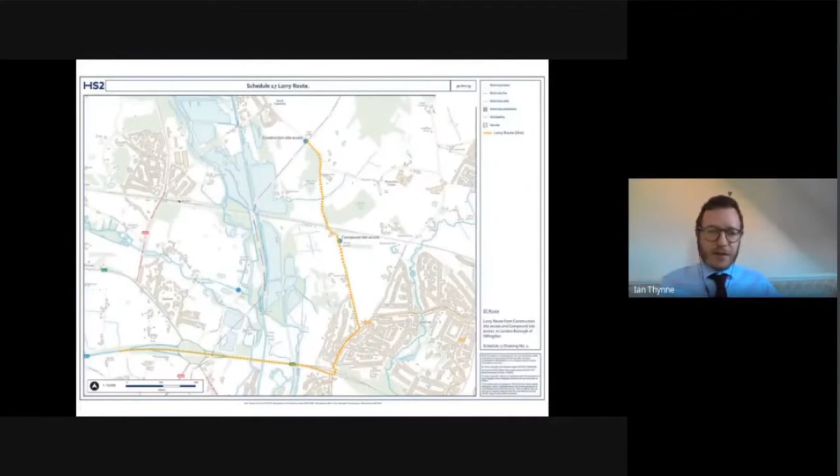Slide 2, that's just the route showing you the way they come out of that - so that is access left out of the compound site access, and right, importantly right, out of construction site access, onto the road of Harvil, right onto Harvil Road into oncoming traffic. So that is a concern that we'll consider in more detail in due course.

Just to give you a little bit of context as to why all these lorries are moving around—it's a slightly messy slide, but the intention is to give you an understanding of why we're moving lorries around the route and what the current works are supposed to support, just to assist with decision making and give context for those interested.

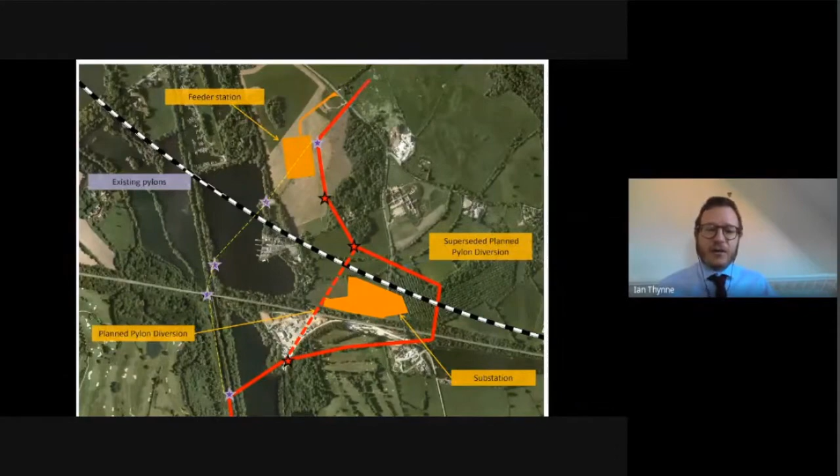Pylons require hefty substructures and significant foundations. The LGV movements are predominantly linked to the removal of broken up foundations and the material to import more aggregate to form new foundations. There's also delivery of the actual structures themselves, which come in kit form and get built up on site. So there's quite a lot of activity associated with moving 6 or 7 pylons, removing 6 or 7, and replacing with 6 or 7 more to get this new alignment in.

So that's the context, Chair.

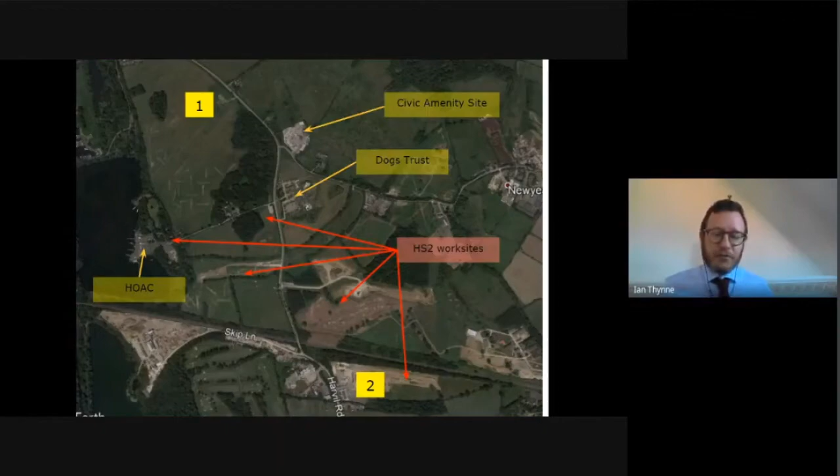The red represents the update we received last night from HS2 Limited, or from the contractors working on behalf of HS2 Limited. So what's happened is, because of COVID-19 and various other matters, the project has slipped somewhat, so we've needed to update the charts as to when the vehicle movements happen.

Now, the problem we've run into is that because there's been a shift in the program, the site operators National Grid have lost a lot of predominant access to the compound access site—that's the one on the southern end, site number 2, to the east of Harvil Road, just south of the Chiltern line. So they no longer have access to that site in the same way as originally presented.

Consequently, most of their movements will now be going to the main access, site number 1, west of Harvil Road, up near New Year's Green Lane. Originally, what was intended was that there'd be 50 movements to that site and 40 movements to the compound access south of the Chiltern line.

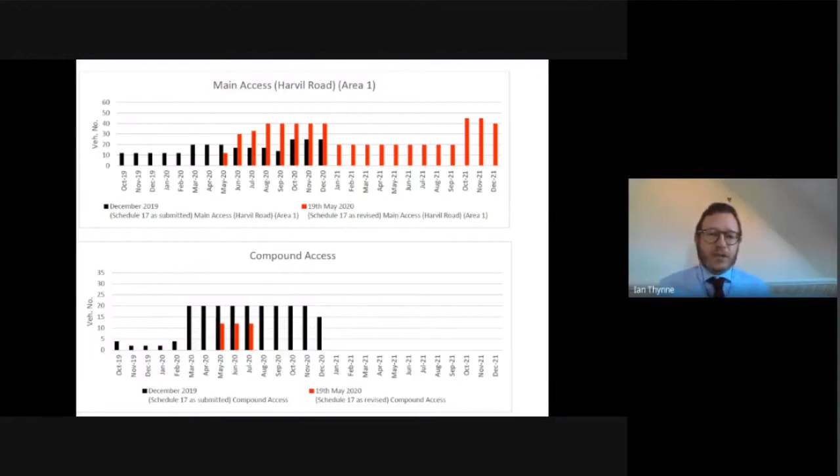The problem is now that they're all merged together to go to one particular site, by a small number that you can see there in May 2020, June 2020, July 2020. So there is now a more intensive use of site number 1, which is a concern for the council, and also a concern for officers, certainly.

Cumulatively, as opposed to having 50 movements a day at that particular site, we're now dealing with 100. These movements are in and out, so that's 50 in, 50 out at its peak, give or take—about 95. You can see the peak activity happening around July, August, September of this year, and then another peak towards the end as they pack up and leave.

That's obviously a concern. That's 100 movements into one site just off Harvil Road, in a particularly concerning area. It's a fast-flowing area of traffic at that point—vehicles are clear of the rest of the HS2 work sites, building up speed before they get to Harefield, and this would be a lot of slow-moving vehicles moving across fast-moving traffic.

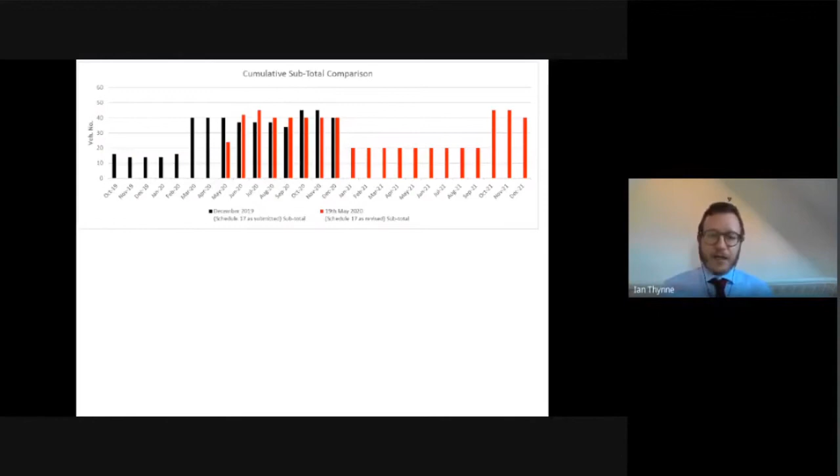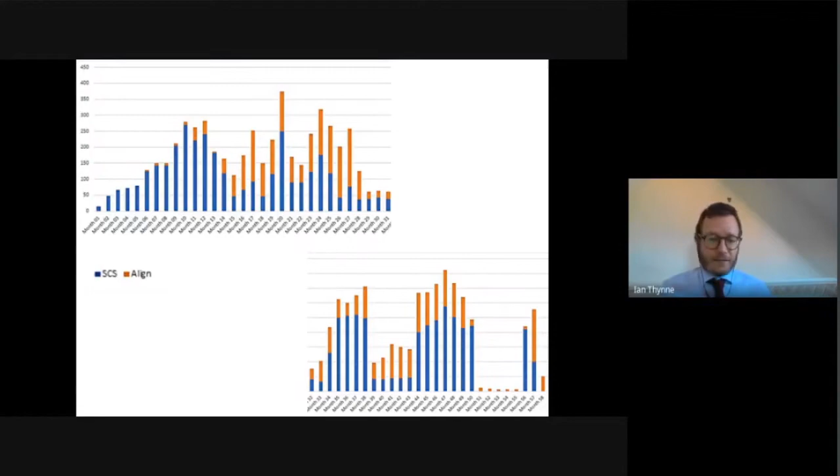Notwithstanding that, there is obviously a concern about moving those vehicles onto and off that highway at that particular point. In summary, these are limited ancillary lorry movements to the main work. The movements associated with the main works are subject to an appeal. There's no evidence available that movements at this level—100 movements a day at this particular area, for a very short period of time relative to the rest of the project—would cause prejudicial effects on the free flow of traffic, in terms of congestion.

The concerns around access, though, have now come to a head. There'll be double the amount of slow-turning vehicles moving across fast-moving traffic approaching Harefield, free of any other restrictions from any other work sites and turnings, as I mentioned. So there is a concern about safe movement of vehicles, and also whether or not those vehicles would end up queuing on the road or causing delays to other road users.

As this information was only presented last night, it leaves us in a difficult position. So the recommendation is two options, Chair. We can either defer to allow HS2 Limited to provide more details on the access arrangements—we don't have sufficient detail—or alternatively, the council can request a condition to secure further details relating to the access arrangements.

That condition would be similar to what we put on last time: prior to the use of the roads for more than 24 lorry movements per day, a scheme for the arrangements—e.g. banksmen, stop and go signs, holding areas—used at the accesses to the worksite shall be submitted and approved in writing by the Highways Authority, i.e. the council, to secure a safe working arrangement at that site. We think this condition is reasonably capable of modifying the existing arrangements, and we think it ought to, given the obvious concerns around safety.

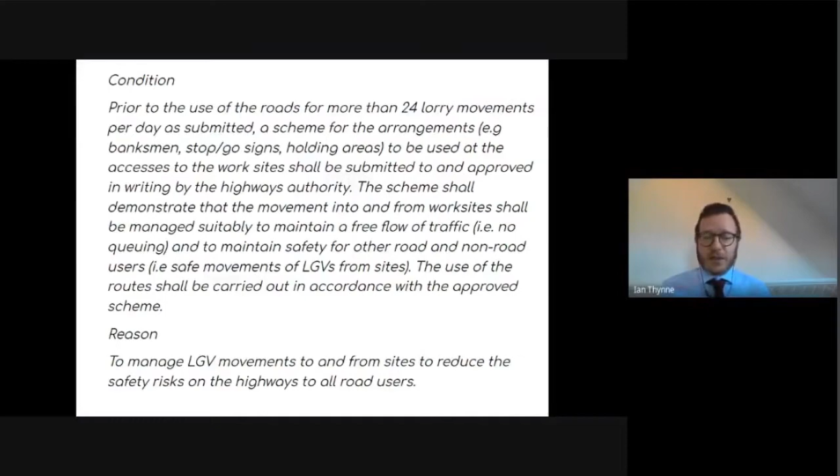However, it would be opportune for us to give HS2 the chance to provide a response to the concerns in this condition. Officers' opinion is that if they can come up with arrangements that negate the need for a condition, that would be preferable—not least because, generally speaking, HS2 Limited do not agree to the imposition of conditions. And in that scenario, normally the officer recommendation is for refusal, which would result in an appeal. So those are the two options, Chairman, as far as officers are concerned: deferral or a condition.

Thank you very much indeed.

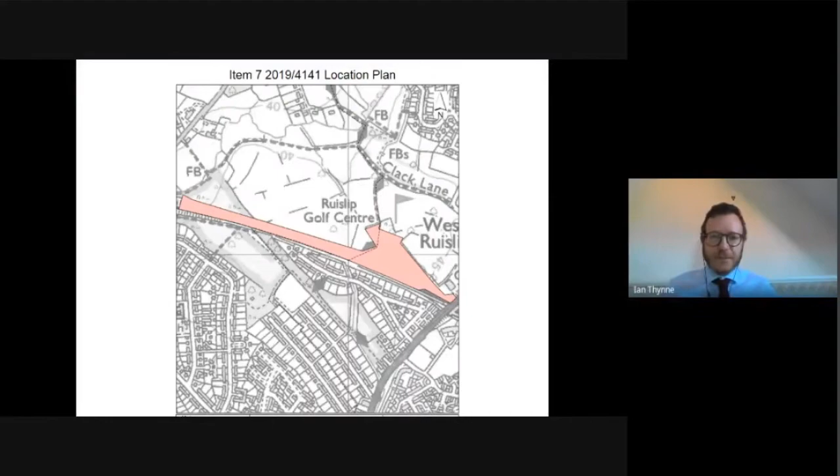So there are several aspects to this, all covered under Schedule 17, but various different parts. The first part is building works under Schedule 17, paragraph 2, and that is for the West Ruislip portal, including the ventilation slots, the portal head house, and the substation building.

There are also earthworks to create some of the building works. So there's the West Ruislip portal hood, a section of the West Ruislip retained embankment, retaining walls and ecological ponds in the golf course. Accompanying that, noise barriers alongside the new route, a road vehicle parking area.

It's referenced in HS2 Act, Schedule 17, paragraph 3, fencing and walls, but again, as with previous submissions, it's only the alignment that the council's interested in or can consider, not the type of fencing wall. And finally, artificial lighting equipment, predominantly used to light the access road to the head house.

So quite a complicated submission. Hopefully I'll be able to explain it in simple terms. Happily take questions at the end.

So there's broadly the red line. We don't need to see the writing on there, but I just want to give you a feel for the broad plans there. So you can see the ponds here. You've got the head house structure here, the access route moving down towards the same road that's served for the golf course.

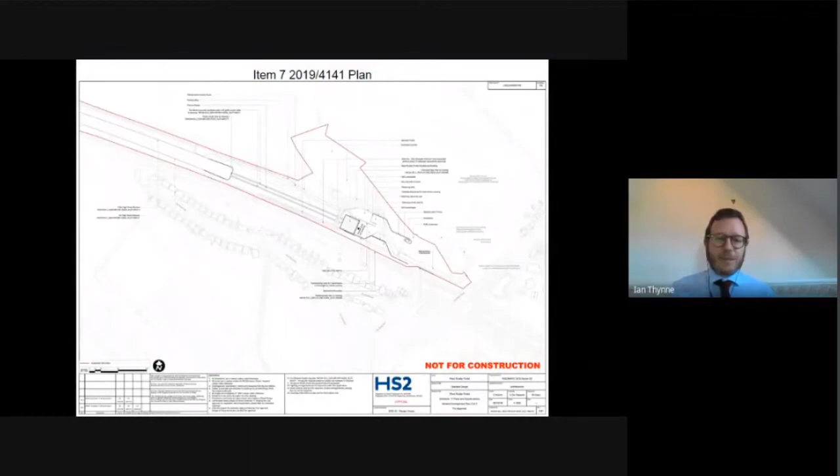So in terms of the bits that I will present at the minute, the first bits are the red block. That is the building works for the head house and a variety of other bits and pieces that you'll see above ground. The yellow section on the plan in front of you, that's the hood, so that's the transition bit - a ventilated hood. I'll come on to that in more detail. And then you get the open expanse, which ultimately terminates at the start of an embankment.

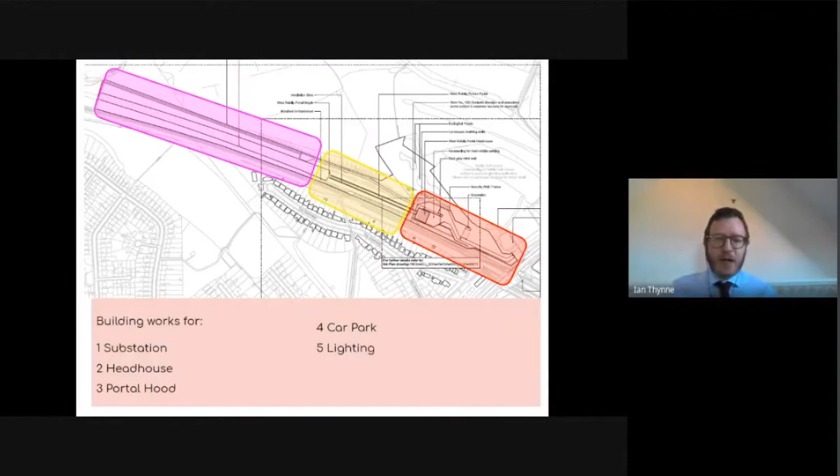That embankment will be the subject of a second package of submissions coming down the line - something to look forward to. So in the first bit, the red bit, I'm going to look at the substation, the head house, the portal hood, the car park, and the lighting. I'm going to deal with all those matters at the same time.

So for building works, Schedule 17, paragraph 2, this is what is open to consideration. As I said before, these are effectively reserved matters. What has been reserved to be dealt with by the local planning authority is the design or external appearance of the building. So the normal rules governing town and country planning acts do not apply. We're only interested in the design or external appearance.

And in particular, whether or not they can be modified to preserve the local environment or local amenity, to prevent or reduce prejudicial effects on road safety or the free flow of traffic, to preserve a site of archaeological or historic interest or nature conservation value.

And importantly, for building works, the council can demonstrate that the development ought to and could reasonably be carried out elsewhere within development limits.

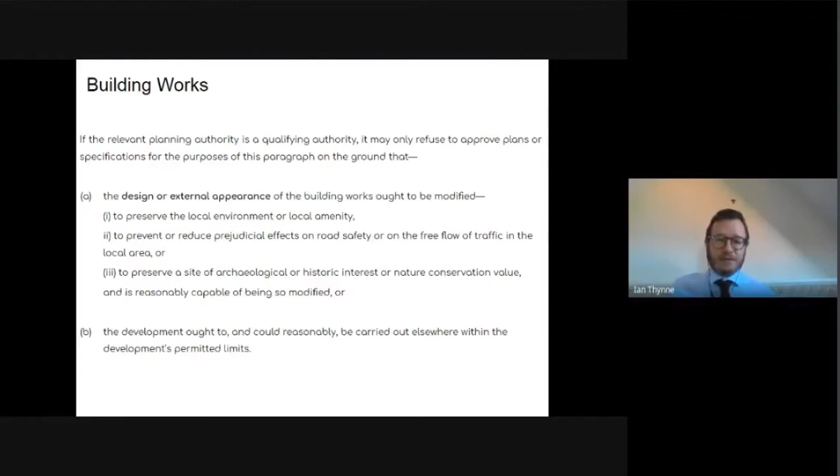So if I come to the head house, substation, car park to start with. The substation, you can see on this plan, this little small box here, near the maintenance access. This is a relatively minor structure, so in terms of council's consideration, officers do not have any concerns with the substation in this location.

It's part of what is effectively now going to be a relatively built-up part of HS2. It will fit within the new setting, which will be the head house, the access road, and all the ancillary equipment that goes alongside that, so that's the fencing and things like that.

It's important to note that the principle of the head house portal going here has been approved by Parliament, so we have very limited scope for being able to start playing around with the actual red line plan where this is all located. So we're just really interested in the design.

Officers don't have an opinion on the design of the substation, it is what it is. If we were to reach the conclusion that it was harmful to the setting of the area, we would then have to demonstrate how it could be changed. I think that would be a little excessive, given that I think the setting of the substation is perfectly acceptable in its new location there.

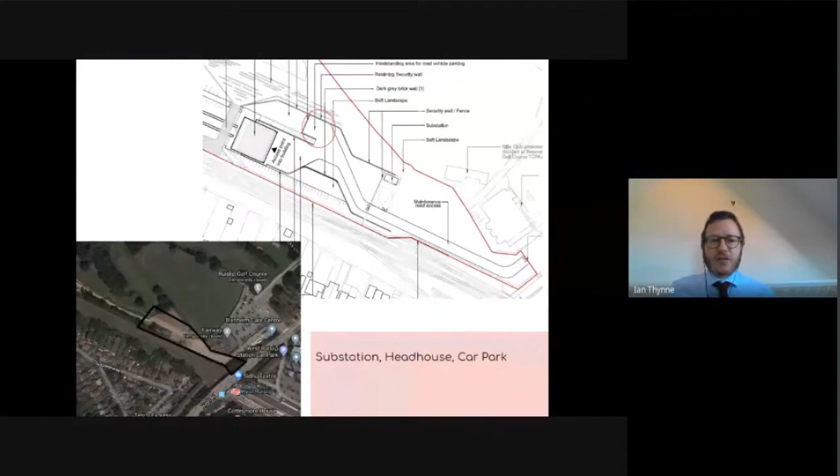Again, if we were to determine that it was incongruous in the area, we would then have to demonstrate how it could be remedied. That would be difficult given that it's been designed to fit the specifications of HS2 operations, i.e. big enough to hold a significant amount of people and also to attend to emergency vehicles. So in that regard, the officers have no concerns or reasons for objections to the road vehicle park, car park, the hard standing area.

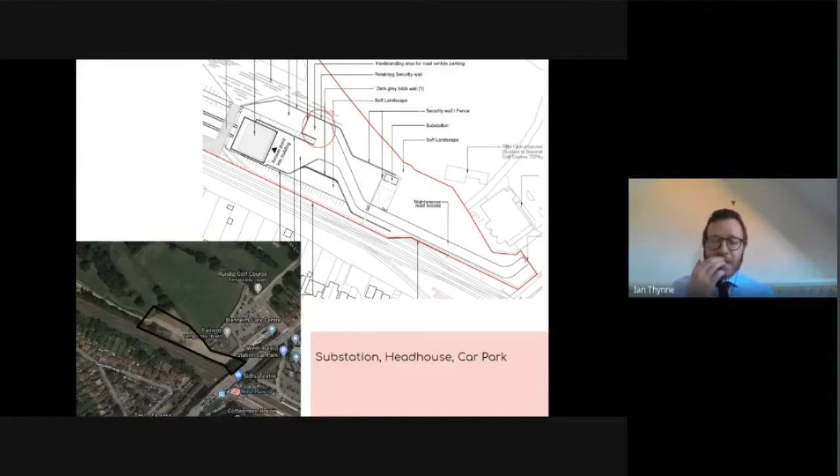Now to the head house itself. This is where some of the plans get a little bit complicated, so I've tried to simplify this.

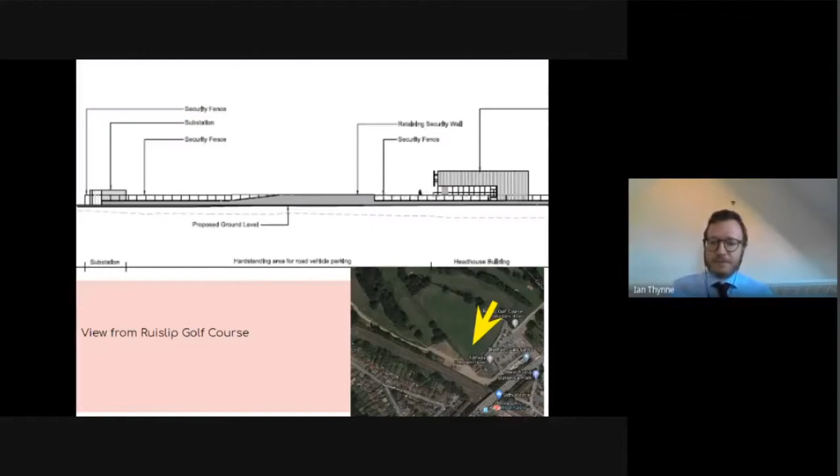Now, imagine you've moved yourself from the golf course and you've somehow managed to breach the security fence and you're looking directly down the tunnel. This is what you would see before the high-speed trains came out the tunnel. You can see now that this is the transition, with the high-speed trains just emerging underneath the head house there, and they will be underneath the new ground level. The old ground level is the red dotted line.

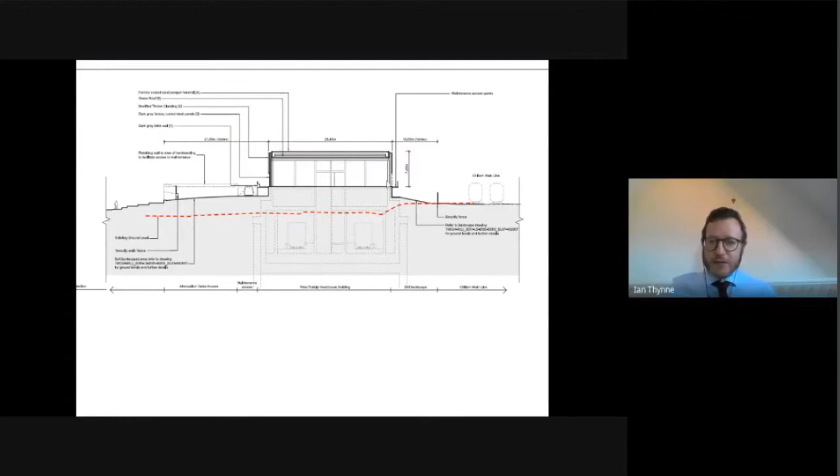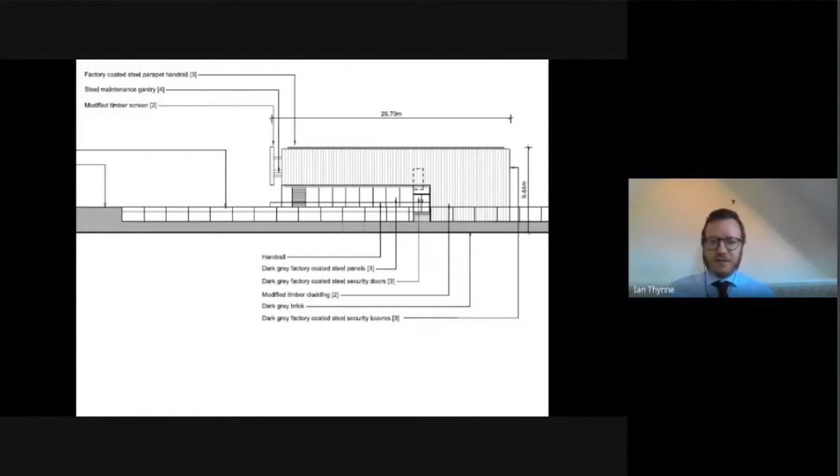These are some of the visuals of it. It's not an entirely undesigned structure, so we've seen lots worse. It could just be covered in concrete. So there's been, in fact, I would say a good attempt to put it neatly within the landscape. It's got several material finishes which I think fit sympathetically within the landscape. We'll come on to those in more detail. But this gives you an indication of the size and bulk of it.

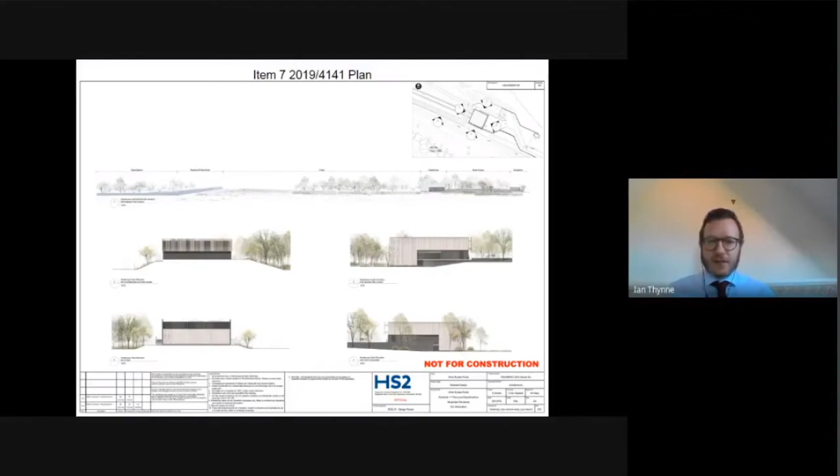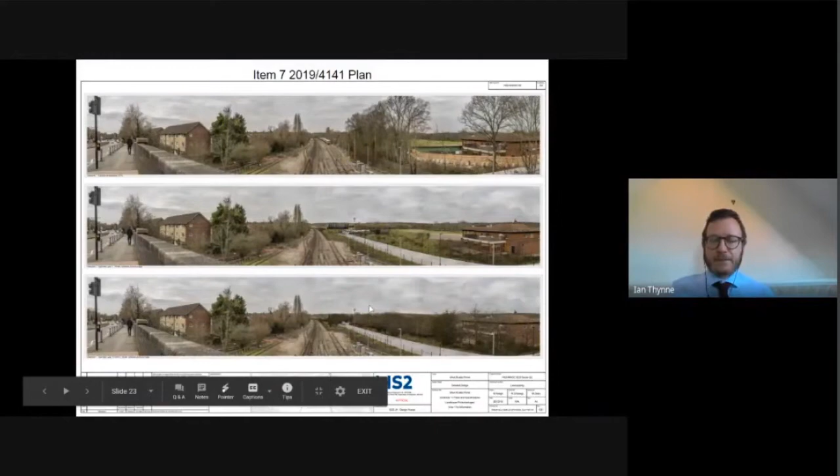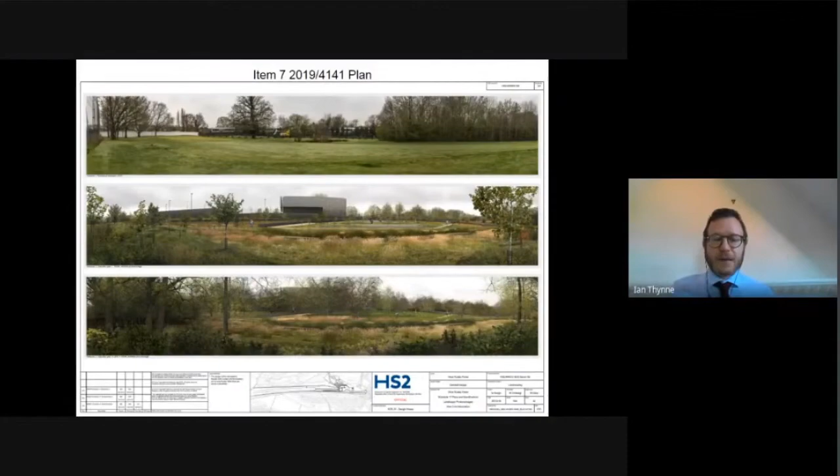But what we're seeking to do through a planning condition, which I'll come to right at the end, is to see if we can secure further amendments to that particular elevation, just to try and soften it a bit more, given that it's quite a bulky structure from some of these properties. And bearing in mind, this is just one property. So I think from that context, in the scope of HS2 and what we can consider under paragraph 2 of Schedule 17, we think that there is a problem with the setting on the local amenity and how the outlook looks for some of these property owners on the Greenway.

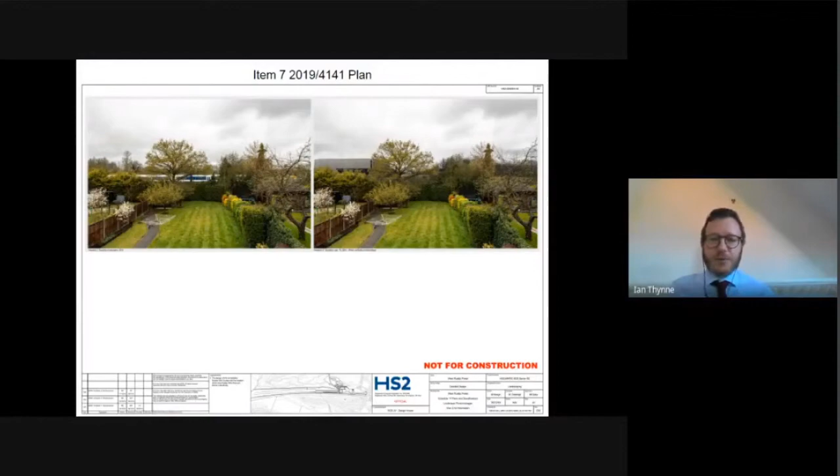So again, just going to the finishes, it has got a green roof, but again, that would be of no comfort for those who are at a level below that on the Greenway. It's a timber clad finish with some brickwork and some stainless steel meshing. So I think in general, quite supportive of the way that it's been designed. We think that there's an opportunity to soften it further.

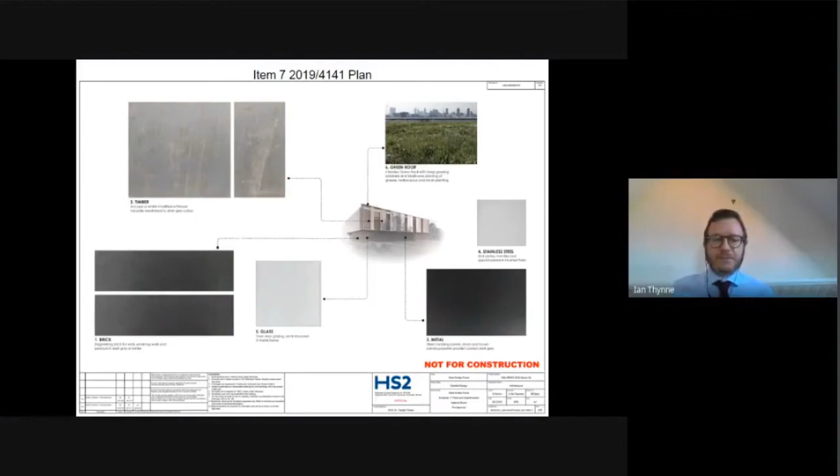In this area, remember that next to this part of the line you've got Ickenham High Road sitting above the structure, then the Chiltern Railway line before you get to the Greenways. Officers do not envisage this lighting being on permanently, so it shouldn't be problematic to people on the Greenways, and the level of lighting is generally considered quite low.

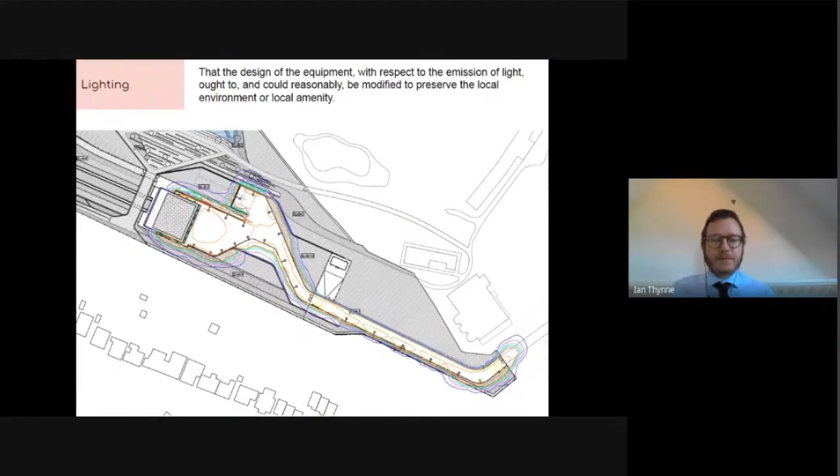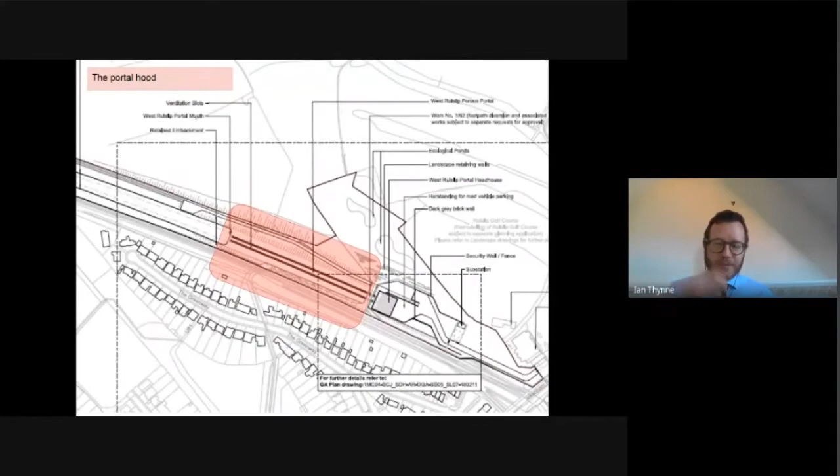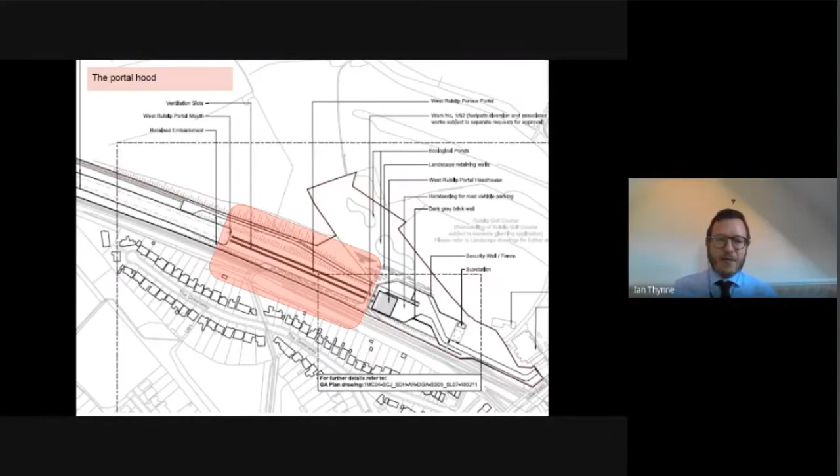That deals with the building works and the portal structure, the first third of the submission. The second third is the tunnel portal hood itself. Originally in the environmental statement this was just proposed to be a concrete slab, which under one of the addendums got lengthened. The council is broadly supportive, because the longer this is, the shorter the area in open air, meaning less noise. So the longer the hood, the better.

The hood is a solid structure with ventilation holes in it. You may have heard of tunnel boom or sonic boom, as high-speed trains emerge from a tunnel bringing with it great energy and a great amount of air. The ventilation points within this hood are designed to disperse that air energy and in turn the noise, so there isn't a sudden enormous belch of noise, if that's the correct phrase.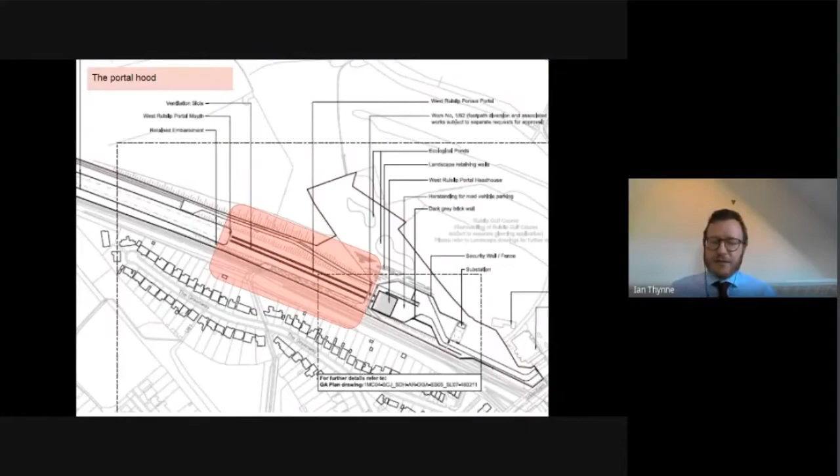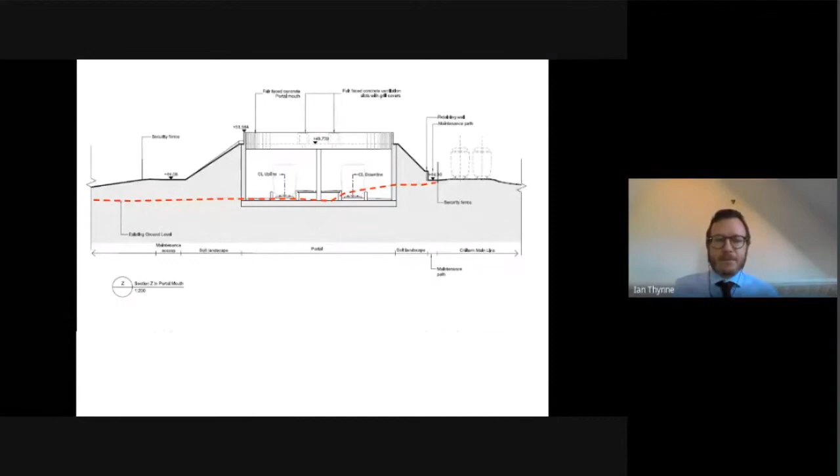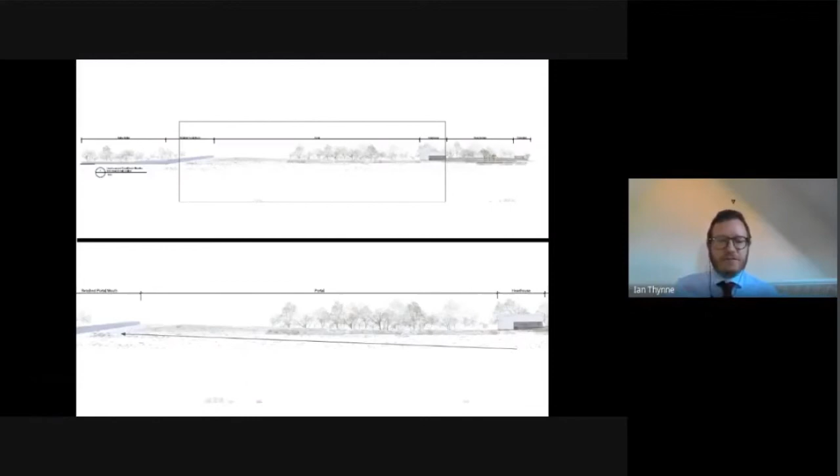If I scroll back up, as we leave the tunnel portal hood, we go into this section at the end, which is the open air section. The section we're concerned with for this Schedule 17 submission is effectively the noise screens, or noise barriers as we'd call them - that's what we're being asked to consider at this particular point.

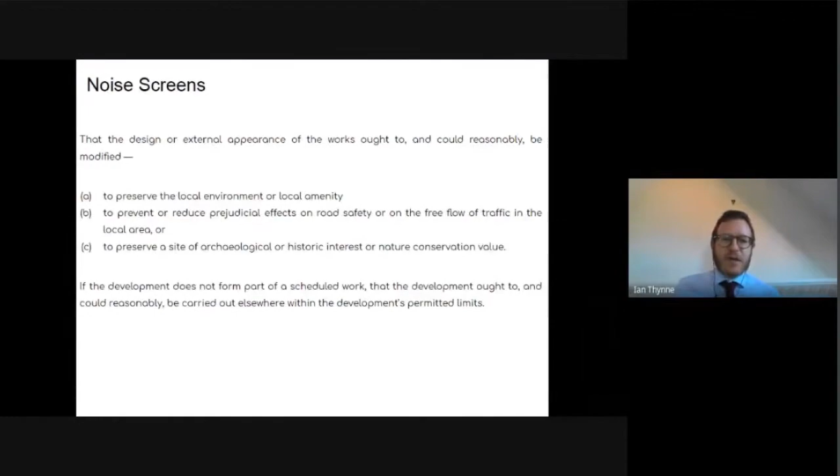Now, the noise of HS2 trains was a significant issue during the parliamentary stages. It generated a lot of concern and is a highly technical issue. It's also something we've never had to contend with in this country, and there are very few precedents across the world for a high-speed train travelling at 250 miles an hour out of a porous tunnel into an open, rural area, as we've got here. So that's the concern we've got.

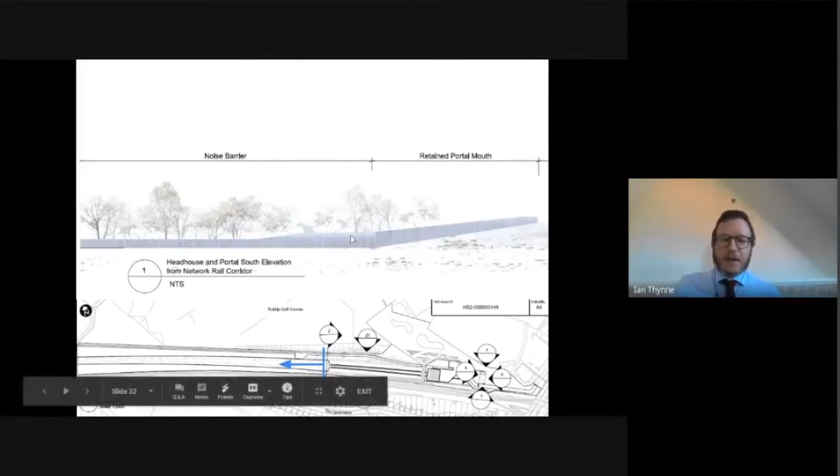The approach taken in the environmental statement was they set a threshold for noise, determined by HS2 Limited and Parliament, and that is the threshold they have to attain. The council cannot impose restrictions on HS2 below that threshold - that is the approved level we have to reach. However, there are obviously concerns about whether that threshold is accurate and whether it is attained through the actual operation of HS2. Remember, it has all been done on modelling, and modelling is not always that accurate.

So here's the noise barrier itself. We've got the retained structure here, keeping up the tunnel portal hood, and as the train comes out, we've got a 5 metre high noise barrier here. So it's quite a significant structure on this side of the HS2 line - that's the Greenway side. There's a 2.5 metre high barrier on the other side. The height of the noise barrier is dictated by residential receptors, or other sensitive noise receptors. The golf course is not a sensitive noise receptor; the residents of the Greenway are.

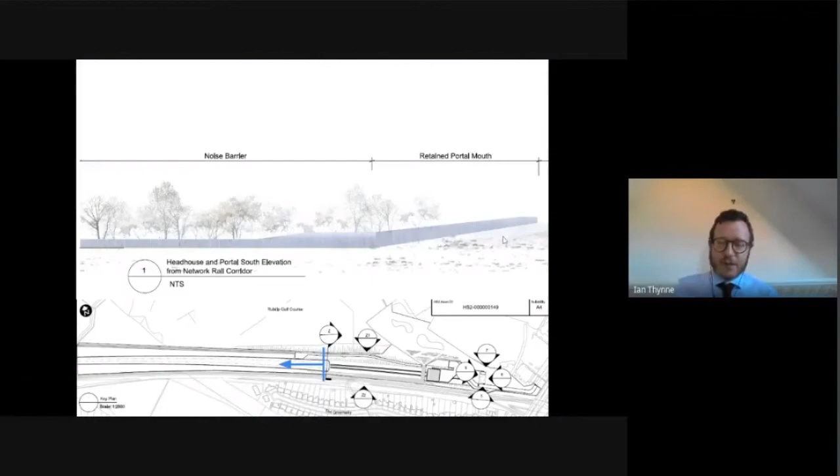So you can imagine you're stood basically at this blue arrow looking down the line now - that's where we are. Effectively, the last section of the Greenway is the section that will see this particular part of the scheme. Most of the others will either see the green tunnel hood or the head house structure, as we've already seen.

So here's a bit more detail. You've got the noise barrier here next to the catenary, which is yet to be designed - it's not shown on the images with much clarity. The noise barrier is 5 metres high to the Greenway, though the Greenway isn't shown on this particular part of the diagram. And then, sorry, 2.5 metres, I said 3 - 2.5 metres this side, facing onto the golf course. You can see the extent of the railway, the security fence one side and the other, and the Chiltern main line here.

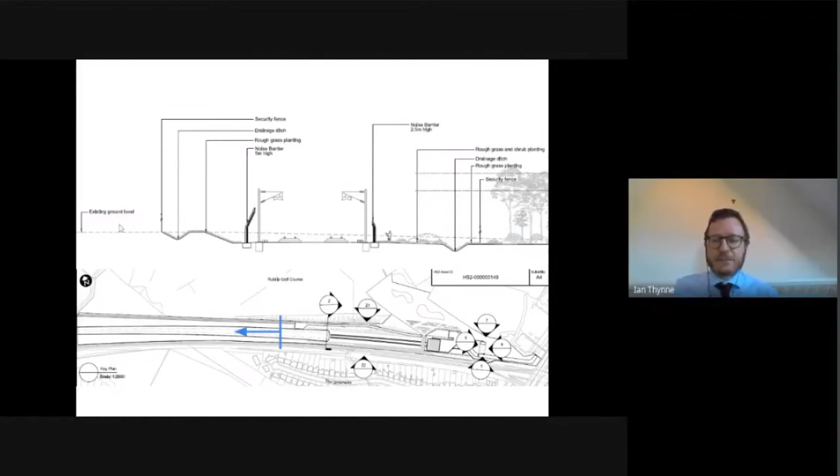So what does this mean in more context? Again, it's not overly clear, and the plans become a little less obvious here in terms of landscape. But certainly from the golf course side, the council has next to no concerns with the height of the noise barrier or its impact. That's because the golf course side will all be planted up, so in time the landscaping will prevent any overseeing of that noise barrier.

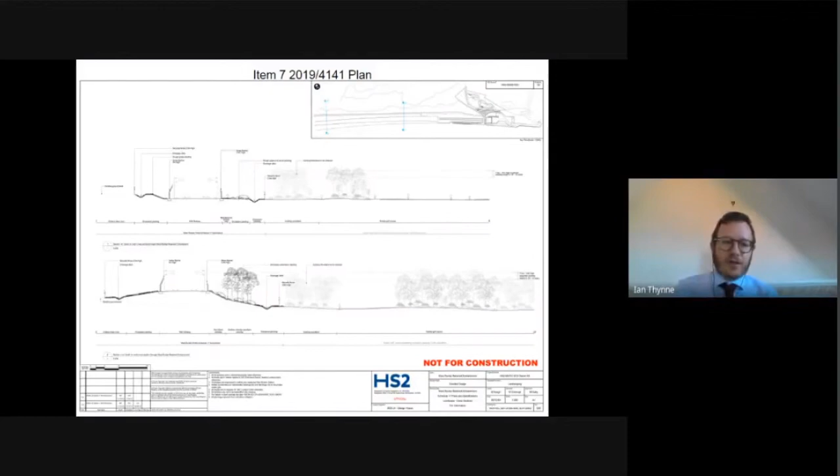The concerns are a bit more heightened for the Greenway, purely because it's a 5 metre high noise barrier. Now, in their wisdom, HS2 Limited presented this as an image representing what you would see of the noise barriers from the Greenway. They took the viewpoint from the middle of the turning circle at the end of the Greenway. They might as well have stayed at home and taken the photo with the lens cap on - it is of no use whatsoever. That image should have been taken from someone's back garden or an alternative position with access, so that's frankly completely irrelevant as far as we're concerned, which does generate a concern.

And that concern is a 5 metre high noise barrier at the back of these properties. It's difficult to understand exactly what the impact would be, so I cannot confirm whether that ought to be changed or whether there ought to be some alternative solution.

Next step is, if we did determine that there was too much of an impact, could we reasonably expect it to be different? There's a trade-off here. A smaller noise barrier means extreme levels of noise for these residents. A larger noise barrier may be slightly incongruous in terms of visual impact, but it does have the benefit of reducing, so the modelling tells us, noise levels in this area to an acceptable level. So in terms of should it change, should it be altered, I definitely think it would have an adverse impact. Would it be reasonably expected to present something different to the noise barrier that still maintains the noise mitigation as well as being a better visual fit?

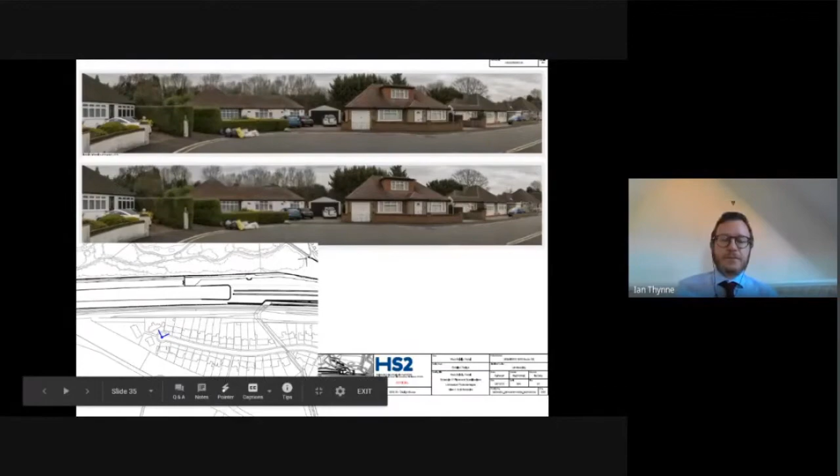So just to summarise that in context before I get to the earthwork section. You can see this is a map of the golf course. Obviously you've got the existing HS2 works as they stand at the minute. This is a potential haul road, and effectively HS2 will run between that haul road area and the Chiltern line. So a lot of those trees will go, but there'll be a new planning application for a 9-hole golf course, which will improve visual amenity at this side and improve the landscaping.

Then you have the open section, which is the concern. That's the area that has the noise barrier, the first bit of open stretch. It would be extremely useful if HS2 had continued this tunnel hood all the way out here. The council did make representations to that effect, but that was not deemed a reasonable amount of cost. So in theory we could make that representation now, but I doubt it would have any legs.

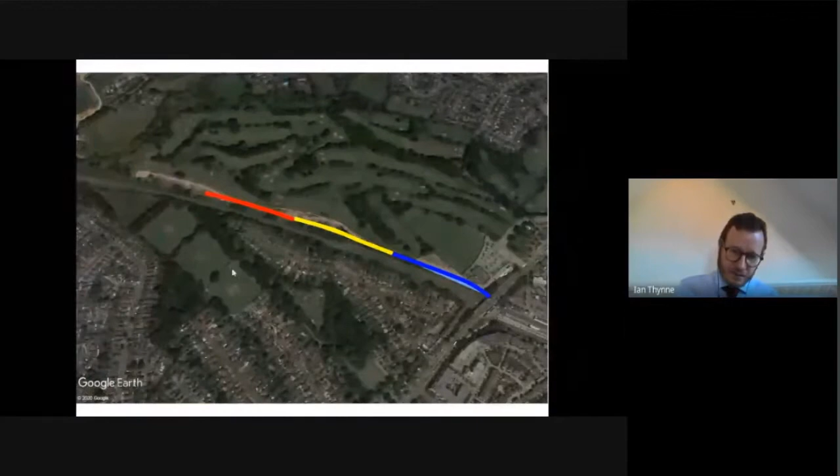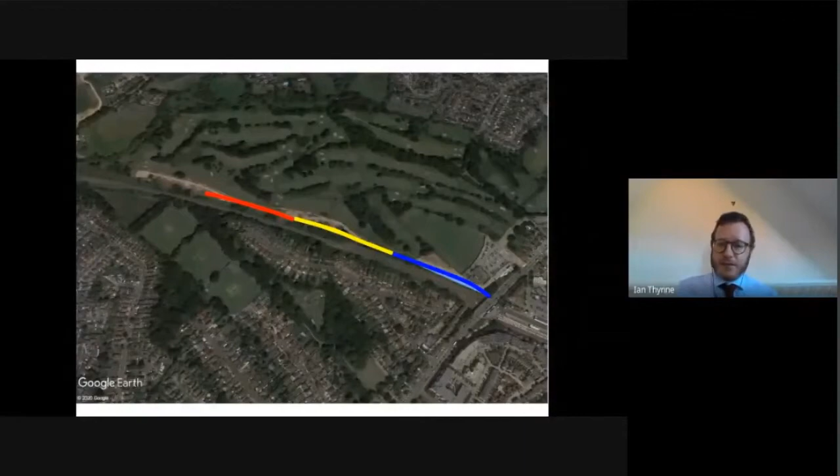So this is the area of concern. I've made the point about the offset between the noise barrier and the landscape. As a consequence, the amount of receptors impacted in this area, as you can see, could have been a lot worse. It is a reduced amount, and I think the noise barriers are necessary to protect them from a much worse level of harm.

So just going to the earthworks, just wrapping it up. Again, we've had earthworks submissions before, so that the design or external appearance of the works ought to and could reasonably be modified to preserve the local environment or local amenity, to prevent or reduce prejudicial effects on road safety, free flow of traffic, and to preserve a site of archaeological or historic interest. So the earthworks in this area relate to the portal hood section in the middle, and the works underneath the retained embankment near the noise barriers, as well as the ecological ponds.

In terms of the earthworks alongside the Chiltern lines, there are no concerns with that. We have to build a high-speed railway, and in terms of the design and external appearance of that, it is what it is. The works to the tunnel portal hood in the middle, the actual earthworks to facilitate that, are actually welcome because we think it reduces the impact. So that's a positive. And then the other structures are purely engineering, so the council would have to go to some lengths to demonstrate those engineering works could be different.

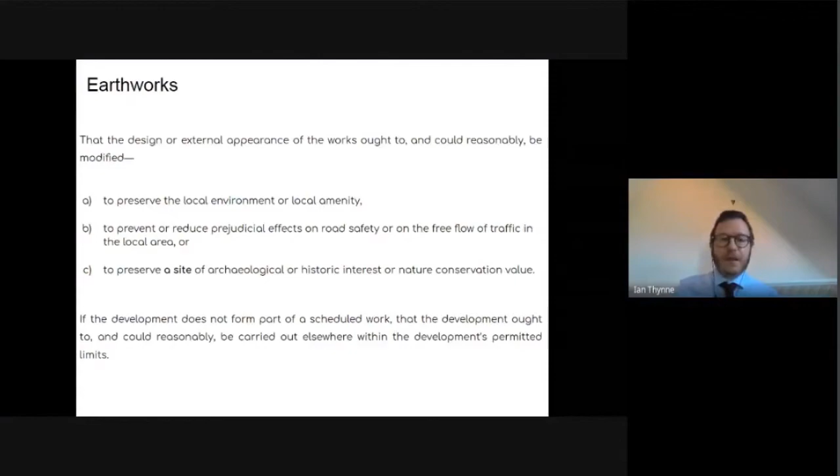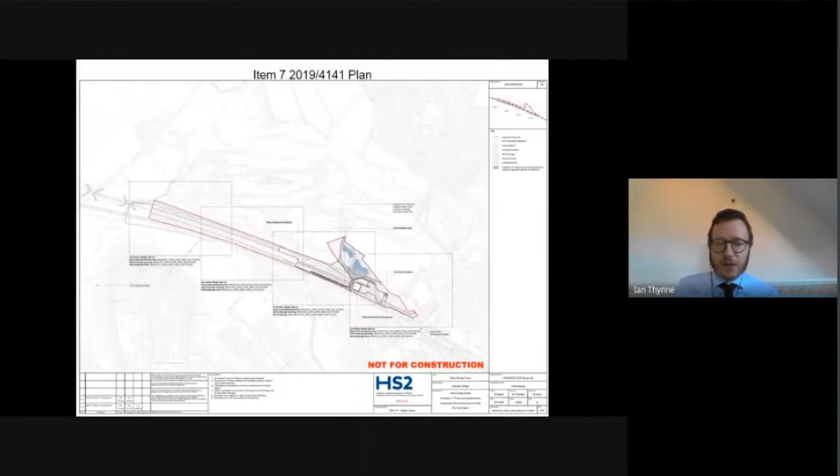The ponds are a slightly different issue. They are on the golf course, you can see the ponds there. In theory they could go anywhere, but again the council has no general concerns with that approach to where the ponds are located. These are ecological ponds which will benefit a diverse wildlife habitat in future. So if they're going anywhere, there's no harm in them going there. The golf course is being reconfigured anyway, so there's no impact on local amenity. Again, I don't have too much of a problem with that.

The Greater London Archaeological Advisory Service gave comments on archaeological impacts. You'll recall that in the very first application, one of the first we dealt with, they objected because there wasn't enough information. Now they're satisfied with the level of information here, that archaeological investigations can be carried out and that the impacts will be low.

So in terms of these ponds, no major concerns, although the issue is how they fit within the existing mature landscape, as there are some mature trees in the area. That's not before this committee, so we've recommended an informative for that to be discussed in more detail.

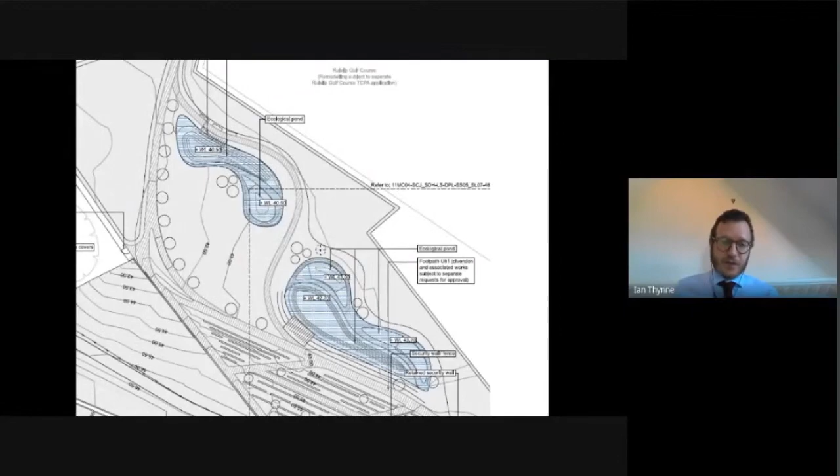The ponds also link to a wider issue with drainage. Again, that's not before this committee tonight, so there's an informative so that gets sorted out at a later date. There's quite a lot of activity in this area in close proximity to the River Pinn, which does have flooding problems, with a lot of changes to landform and reconfiguration of the golf course. So we need to make sure it all fits in without increasing the risk of flooding to others. There's an informative that should be secured.

And that's just a cut section showing where the ponds are.

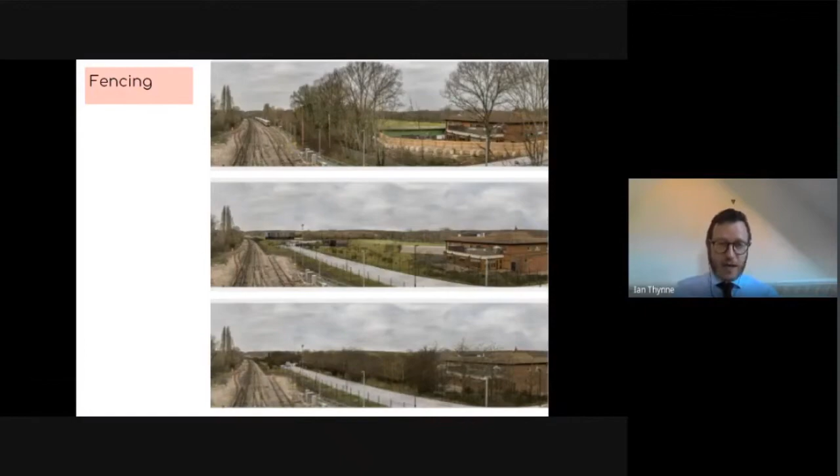In terms of fencing, that's one of the last elements of this. Again, only the route of the fencing is up for discussion with this committee—the type of fencing is irrelevant, but this image just shows the kind of fencing we're talking about. It's secure fencing to stop people getting onto the head house area and then ultimately onto the high-speed line, given it's a railway going through a relatively rural setting.

I should point out that the landscaping you've seen, while some of it looks nice and well designed, is not for approval, so those discussions are ongoing. Whilst the landscaping is relied on to form some mitigation to the visual impacts, it is not yet properly secured. That will happen at a later point.

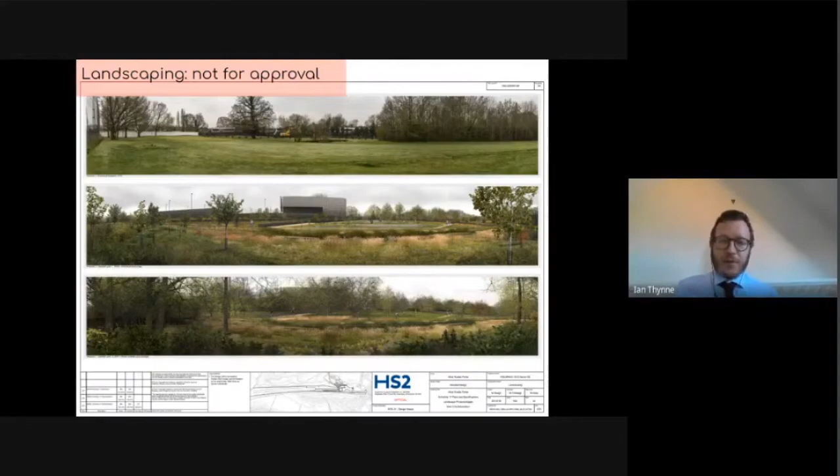So in terms of recommendations, Chair, you'll be glad to know I've nearly finished. For the building works and head house design, we've recommended approval subject to one condition, to seek some form of softening through living walls or living screens. All other building works are recommended for approval as submitted. For the earthworks, we've recommended an informative relating to drainage as discussed, and an informative relating to tree protection around the ecological ponds.

In terms of the noise screens, this is a slightly different matter, and probably going to be a slightly controversial condition for HS2 Limited. As things stand, this council has nothing before it to say there's going to be an adequate monitoring and reporting regime to this authority. As I said before, those noise screens are based on modelling work.

As a slight anecdote, I once was out on site with a flood engineer at the time when there was flooding up in Leeds, and we were stood in a car park that was basically covered in water. He said that water shouldn't be there because his modelling told him that water shouldn't be there, but we both saw it with our own eyes. So in terms of modelling, we all know what modelling can do—it's basically a prediction, and predictions are best based on precedent. There is no precedent for this, so we are somewhat scrabbling in the dark on this one.

So the council is really concerned about the noise of HS2, particularly leaving that tunnel area, particularly for the residents at the end of the greenways who've got a 5 metre high noise barrier. If that doesn't work, or if they get noise levels above what was predicted, then there is a real threat to their livelihood, to their well-being—the amenity of the local residents. So we recommended a condition for monitoring and reporting, and then agreeing triggers as to what would happen after that.